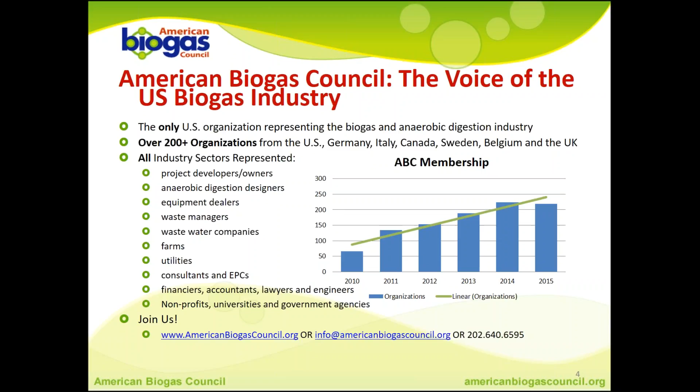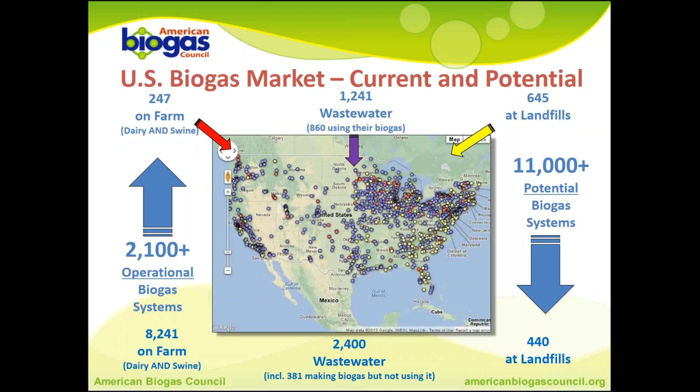We are just super excited that all of you are able to join us today, because this is the most widely attended webinar, at least for the folks who have registered for it. When I checked an hour ago, we had almost 400 people signed up for this, which makes it our largest, most popular webinar ever. So we're really excited to be reaching so many folks to talk about biogas, which is, of course, a big focus of the American Biogas Council. And we hope that you'll learn a lot.

Today's presentation is transforming wastewater to energy, focused on our anaerobic technologies for food and beverage facilities.

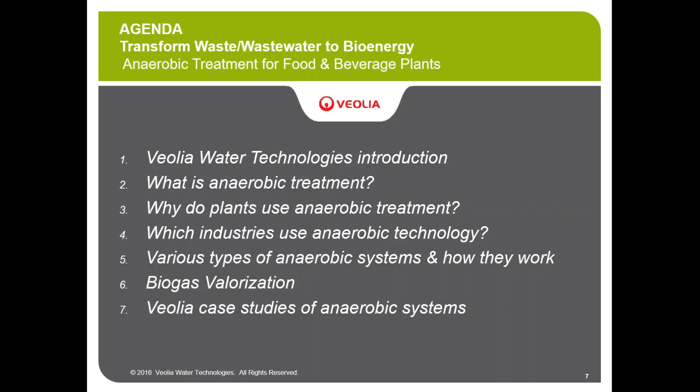Here's our agenda for today's discussion. I'm going to start with a brief introduction of Veolia Water Technologies, then go over the simple parts of what anaerobic treatment is, why plants use anaerobic treatment, and which industries. Then we're going to get into various types of anaerobic systems, how they work, talk about biogas valorization, and end with a number of anaerobic case studies.

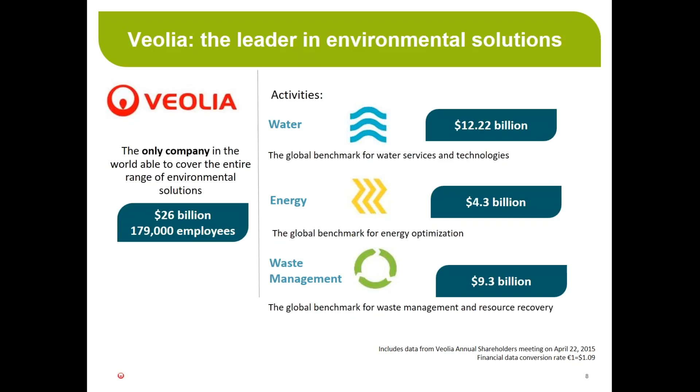Veolia, as Patrick alluded to, is a leading water treatment company. We are a $26 billion international company focused on water, energy, and waste management. As you can see based on the split of our revenues, $12 billion of water treatment revenue makes us the largest water treatment company in the world.

Veolia is comprised of a number of operating groups involved in water treatment. The Veolia Water Technology Group is where we reside, and we design and supply water and wastewater treatment systems for municipal and industrial users.

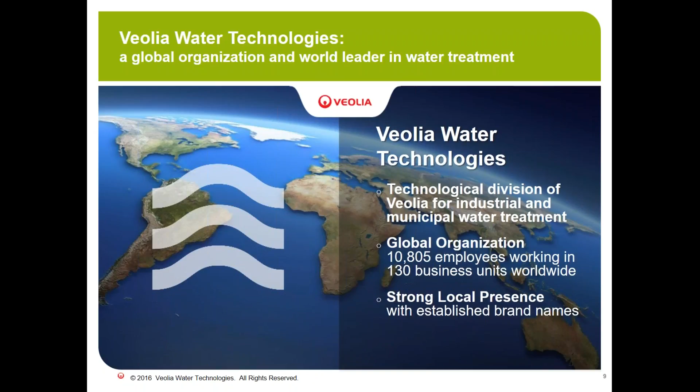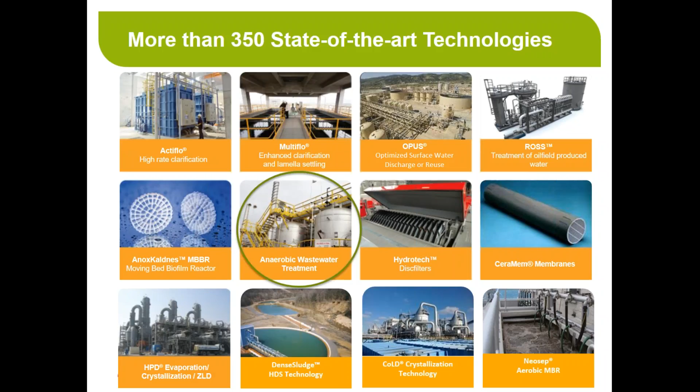The anaerobic technology within Veolia resides within the BioThane group. BioThane is now going on 10 years since they were acquired by Veolia. They installed their first anaerobic system 35 years ago, and there are now more than 600 full-scale installations of our anaerobic systems worldwide. So we have 35 years of experience in this technology, many repeat customers, and unmatched capabilities in this field.

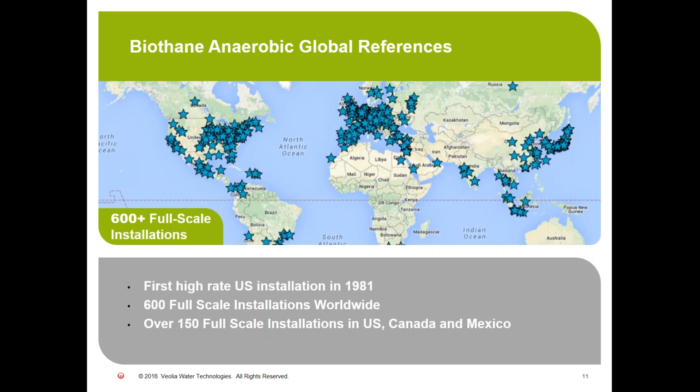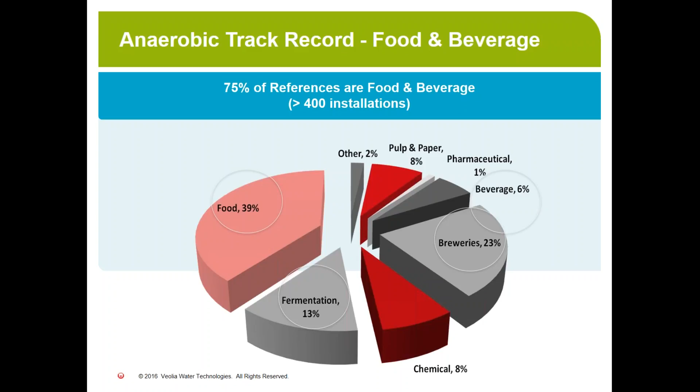You can see here a pie chart breaking down the installation references that we have in anaerobic. Anaerobic water treatment tends to favor application in high-strength waste streams, so we see a very large percentage of our installations based in food and beverage, including brewing, and in other fermentation broth applications where you have high-strength organics.

Now we're going to go into a little bit of basic technical discussion about what anaerobic treatment is.

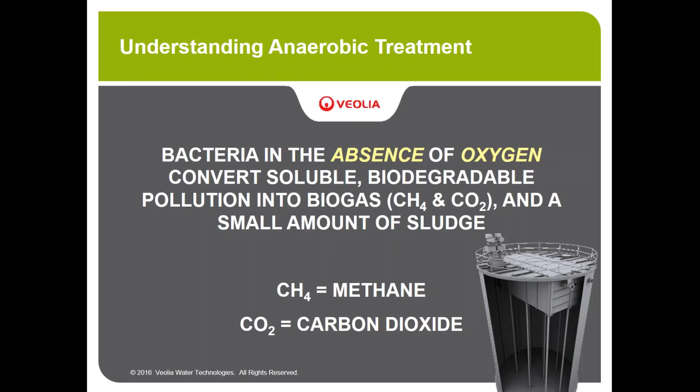So technically, here we go. The anaerobic digestion - what does anaerobic mean? It's basically bacteria in the absence of free oxygen, and we're converting organic biodegradable material into biogas, a combination of methane and carbon dioxide, and producing a small amount of sludge. So we'll talk today about conversion to methane, which is where you get the energy, and also conversion to carbon dioxide as part of the biogas.

This is a diagram of the metabolic pathway for anaerobic digestion. You have hydrolysis, which is the breakdown of organic material into simple materials, simple sugars or amino acids, and then two steps in the digestion. We have acetogenesis, which converts those simple materials into volatile organic acids. Then you have a second step, methanogenesis, where the methanogens convert those fatty acids into methane.

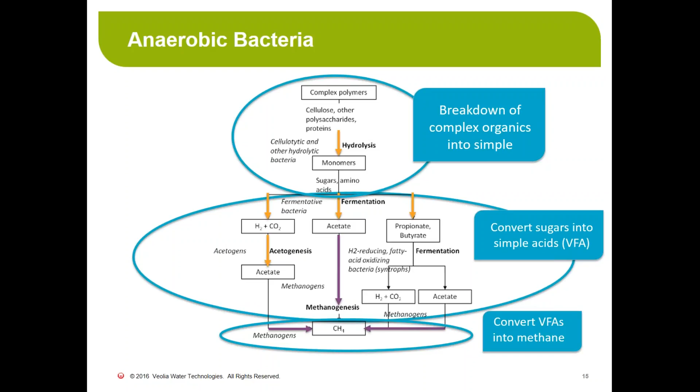Some simple terminology that you'll hear in all wastewater discussions and will be used later in the presentation. Most people probably know the first of these: COD refers to chemical oxygen demand, the amount of oxygen required by a wastewater to oxidize all the organic material. Biochemical oxygen demand, BOD, is always lower than COD, and represents the amount of oxygen for bacteria to biologically degrade the organic material present. Total suspended solids, self-explanatory - insoluble suspended matter which may or may not be degradable, but affects the design of anaerobic systems.

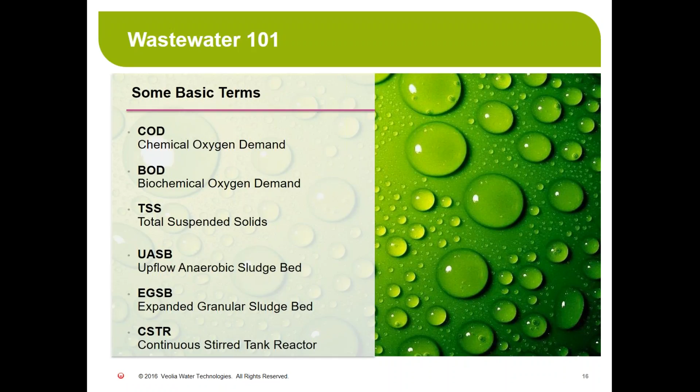Then we have three different acronyms we use to describe the type of anaerobic system. We have UASB, which describes an upflow anaerobic sludge bed, and EGSB, a higher rate upflow system - the expanded granular sludge bed. And then we have CSTR, which you can imagine is a continuously stirred tank reactor, a different type of reactor used in anaerobic treatment.

So, some of the reasons why we would want to use anaerobic treatment for wastewater.

Some of the key drivers as to why you would want to look at anaerobic digestion: number one would be reduction of your surcharges. Most sites are charged based on BOD or COD discharge, and anaerobic digestion can be used to reduce those. You may have that situation whether or not you are discharging to a POTW or direct discharging to a stream. It could also be part of a corporate sustainability program.

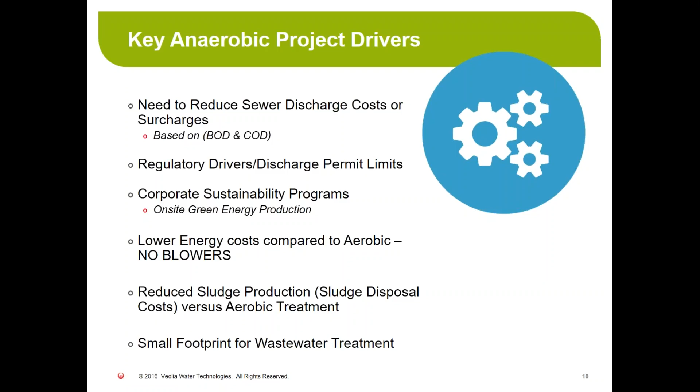In terms of what anaerobic in particular does compared to aerobic biological treatment, it has low energy use because it doesn't require blowers to produce a large volume of air. It also generates a much lower amount of sludge for disposal than an aerobic system, and it's typically a much smaller footprint for equipment, saving space in your plant compared to an aerobic basin.

This diagram gives an illustration of what I just said. If you start with 100 kilograms of COD, on the left you have an aerobic system, on the right an anaerobic system. You can see on the left a bit more conversion of the COD: you have 90 to 98% COD reduction with aerobic, and 85% with anaerobic. But notice the amount of sludge — you have 1/6 to 1/12 the amount of sludge produced in an anaerobic system, and you don't have the 100 kilowatt hours of electricity required for the blowers. So with an aerobic system you have a net energy consumer and high sludge production. With anaerobic, you produce biogas, so you're a net energy producer with low sludge production.

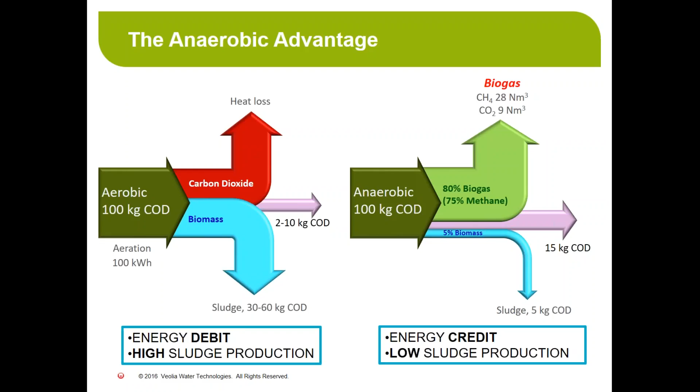We're going to talk more in detail about these types when I turn it over to the technical team, but in general we're talking about high rate anaerobic systems being the UASB and EGSB — high rate means it's able to be loaded at a high organic rate. The medium rate would be a medium loading rate, either the CSTR type or a new type combining CSTR with membranes, our membrane anaerobic MBR system. Then for low rate or high solids reactors, we have our traditional CSTR.

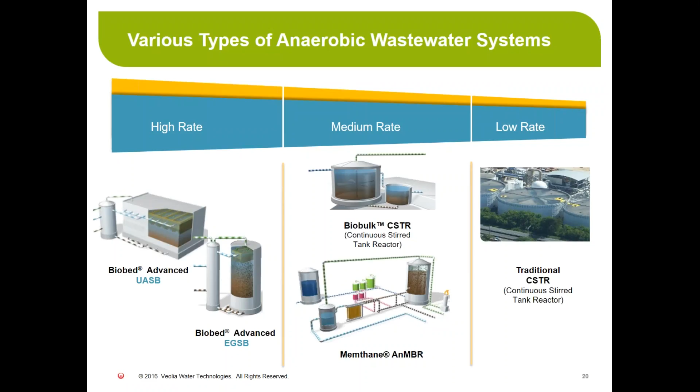The choice of which of these systems we use for a given application depends primarily on the degradability, the COD concentration in the water being treated, and the amount of suspended solids in the system. The first diagram shows all three systems, but describes the granular sludge system, which is what we get from the high rate units. They're designed for the lowest range of COD and for lower suspended solids material. Basically, the retention time and loading rate in a high rate reactor allows for excellent digestion of soluble COD and less so of suspended solids.

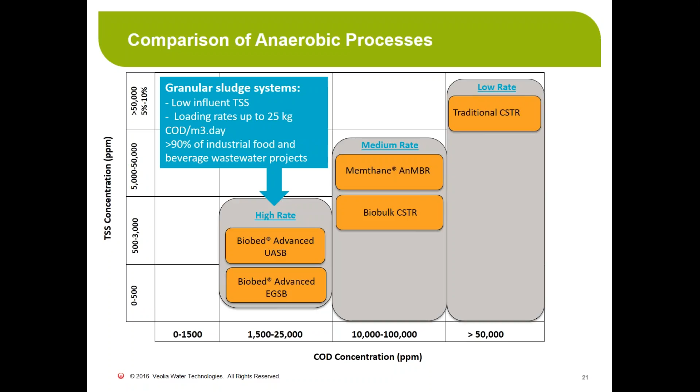The middle category, where we have our medium rate membrane and biobulk CSTR, is designed for much higher COD loadings. We're limited to 25,000 in the high rate, and we're showing between 10,000 and 100,000 here for COD in the medium rate. On the y-axis, you can see the amount of suspended solids allowable in these technologies is much higher than with a high rate system.

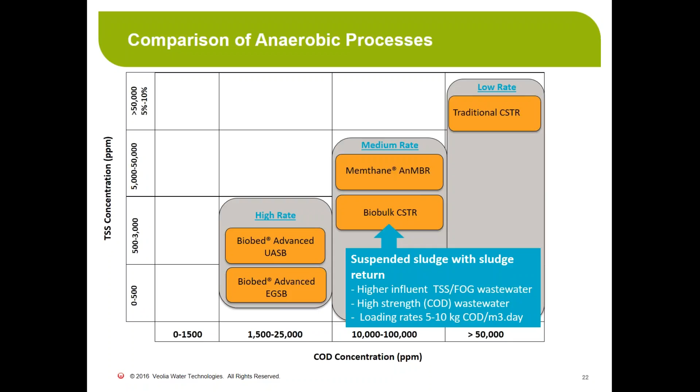The low rate system, the CSTR, is for both high concentration of COD and also very high suspended solids. This technology would potentially be used for slurries, like a starch slurry, or very high fats, oil, and grease, or suspended solids.

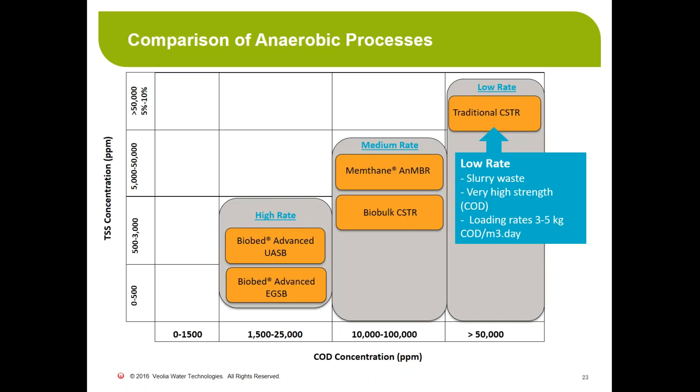In many applications, the effluent requirements will be lower than what you can achieve with an anaerobic system alone, given that your removal rate will be maybe 85 to 90% in most applications. It's very common that an anaerobic system would be combined with additional technologies to reach lower discharge limits for COD or suspended solids. Veolia supplies full process trains and provides full process guarantees on our systems, and many of these combine the anaerobic systems we're discussing today with physical separation equipment or aerobic polishing equipment to achieve lower discharge limits, or potentially membrane systems to allow for water recycle from the wastewater.

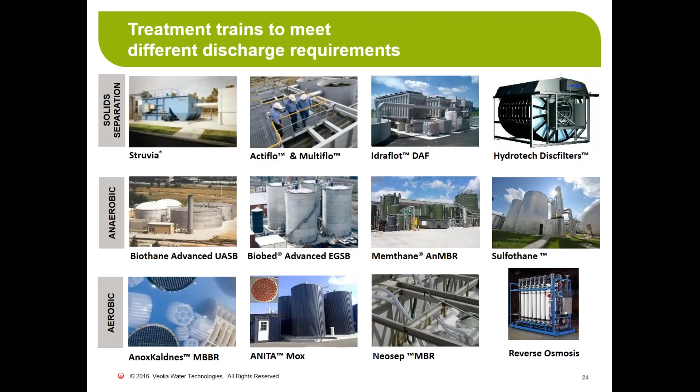Thanks, Dan. We'll transition to Greg and Jill here in a second, but Dan, while I've got you here, just two quick questions: for the systems you were just describing, are they all continuous, or are any of them batch systems?

Most of these systems are continuous. All of the granular-based systems are continuous systems. They can all be continuous, I guess would be the answer.

If you have a batch process in your production facility, typically we have some type of equalization tank to allow the system to be continuous. Although there are a lot of facilities in the food and beverage world that don't run on weekends or holidays, the good thing about an anaerobic treatment system is that it can basically shut off during the weekend without any feed and be perfectly fine to start back up again on Monday morning. So we take a batch process and typically make it continuous with equalization, but shutting down for weekends or nights is very common.

And all three of the systems are applicable to the food and beverage industry, right? Correct. We have systems installed of all three types in the food and beverage industry.

We want to go into a little more detail about the main processes that Dan talked to us about. So we're going to talk about the advanced biobed EGSB, which you can see in the small diagram in the lower left-hand corner, and the advanced BioThane UASB, shown in the lower right-hand corner. Our modular plants are in the middle—they're EGSBs, prefabricated and ready to go.

I also wanted to mention that we're developing and working to get better control of our processes through something we call smart control, which allows for less operator involvement time and allows computer control of the system, saving on operating costs. If we have the next slide, please.

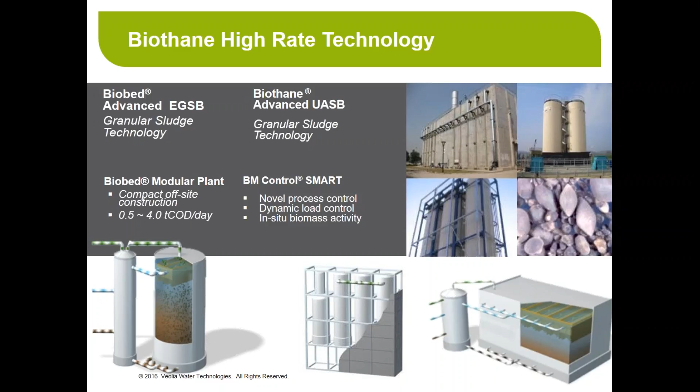The key to these high-rate systems is the granular biomass. These granules sort of look like caviar, as you can see in these pictures. The key characteristic of these granules is that they contain both the methane and acid-forming bacteria that Dan talked about. The big thing is they have a settling velocity of 60 meters per hour, which is phenomenal. If any of you are familiar with aerobic sludge, which takes forever to settle, these granules settle like rocks.

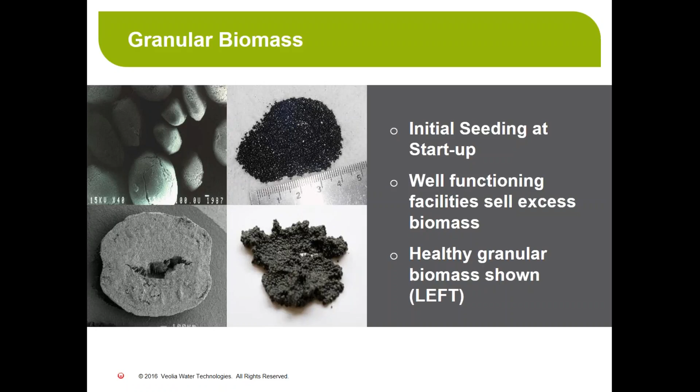These allow for a concentrated biomass bed at the bottom of these reactors. We can get up to 10 to 12% solids in the sludge bed. This allows for a very dense sludge bed in the tanks, which allows the tanks to be very, very small compared to what you would need to treat the wastewater aerobically. These bacteria also operate at relatively high F to M ratios—somewhere in the range from 0.4 up to as high as 1 pound per pound, that's pound of COD per pound of volatile suspended solids in the reactors. Next slide, please.

Let's talk about the BioThane UASB systems first. These were the first reactors in our system. They were developed many years ago in the 1970s in the Netherlands.

The wastewater then filters up through the sludge bed, where most of the soluble pollutants are converted into acids and then methane. It then filters up to a sludge blanket, which is really just a lighter density part of the biomass, and then goes up into the settler where the sludge, gas, and liquid are all separated.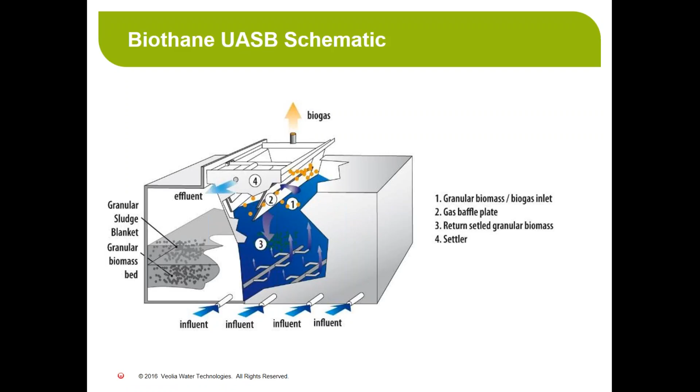Next picture, please. The EGSB actually uses the same sludge as we used in the UASB. It's all granular sludge, and we can use the sludge from one to feed the other.

The big difference between the UASB and the EGSB is that the upward velocities in the EGSB are higher than in the UASB. This is allowable because the settler is slightly different and allows for the higher upflow velocities, for the sludge to be separated from the gas and the liquid. But it's the same basic principle.

Most of the mixing in both of these reactors is done by the biogas. You'll notice that neither tank has any sort of mixing equipment in it. It's very simple: you put the water in the bottom, it filters up through the sludge bed, the sludge is separated at the top and remains in the tank, the gas is collected at the top of the reactor, and the clean water overflows at the top. Very, very simple, mechanically speaking.

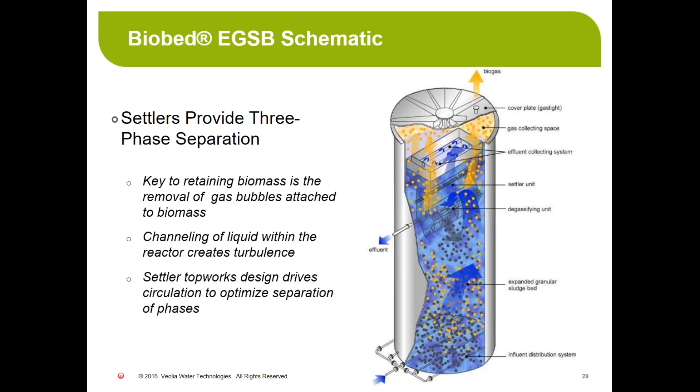Next picture, please. We've combined our original UASB and EGSB settlers and made a new advanced biobed settler, which combines the best features of the UASB and EGSB original settlers and added a tilted tube separator at the top. It's sort of like a fat lamella at the top, which allows more of the finer particles that don't settle at the higher upflow velocities to settle back into the reactor.

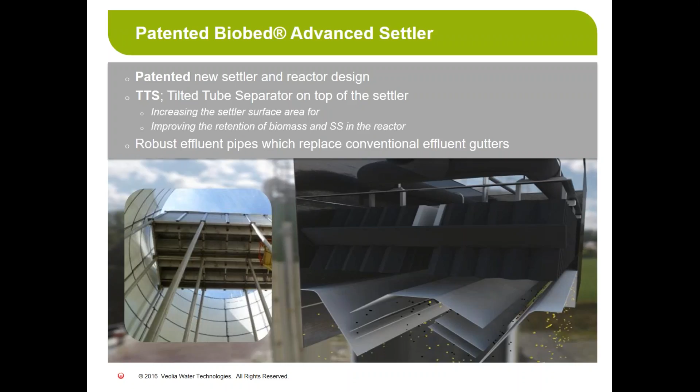The key to the settler is to keep the sludge in the reactor. If the biomass is not in the reactor, it can't do the work to create the biogas which everybody wants to collect and use. So this is a picture of our newest settler with the tilted tube separator on top. Now I'm going to turn it over to Greg to talk about our medium rate and membrane systems.

Thank you, Jill, for your discussion around the high rate systems. Now we're going to talk a little bit about medium rate systems. As was discussed, high rate systems really are for degrading soluble COD with low influent suspended solids. So what happens if you have higher influent suspended solids and you want to treat your system anaerobically? Then you move into potentially medium rate systems.

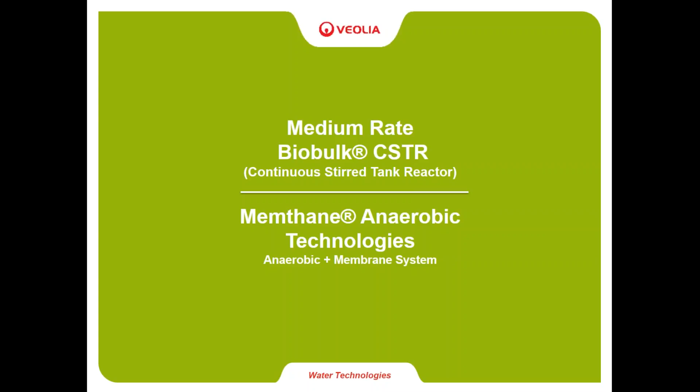There's two main types of medium rate systems. The first is CSTR technology, continuous stirred tank reactor technology. This is suitable for waste streams with higher COD, higher suspended solids, or specifically FOG, like you see in dairies and other industries. It can be a once-through system, or we can have a clarifier on the discharge to recycle some solids back, just like in an activated sludge plant. It's sort of an anaerobic activated sludge, you could call it. So this is a technology you'd use for CODs with high suspended solids or FOG in the influent that you do not want to remove.

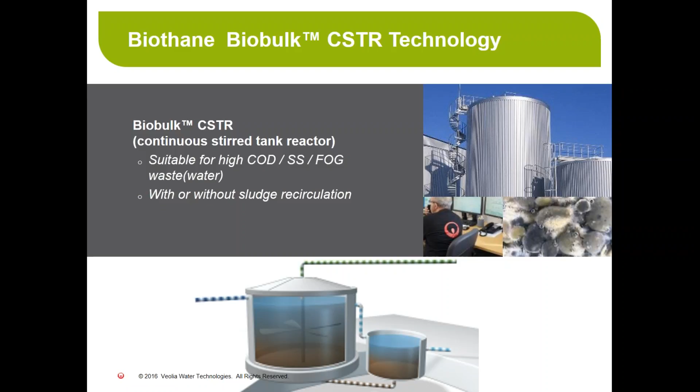The next generation of CSTR technology is coupling membranes to CSTRs. The main advantage of coupling a membrane to any biological system is that membranes are a physical barrier to sludge washout, and because of that, you can decouple the HRT, or hydraulic retention time, from the SRT, the sludge retention time.

So that allows wastewaters with high suspended solids that might traditionally need a CSTR of 15 or 20 days retention, to instead have a reactor vessel with only 1 or 2 days of hydraulic retention time, yet still have 30, 40, or 50 days of sludge retention time.

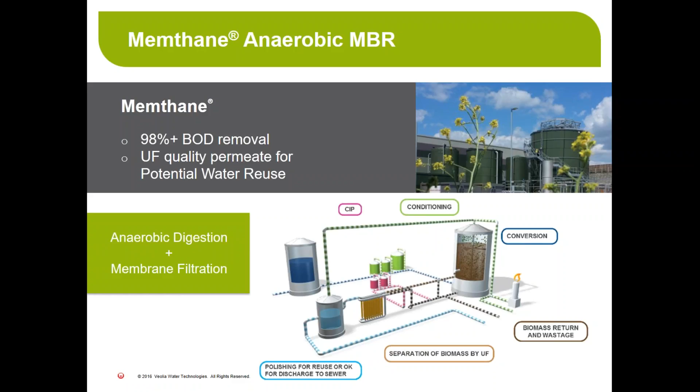The other large advantage of membrane technology is extremely high BOD and COD removal, where a traditional high-rate or CSTR system might get 85 to 90%. An anaerobic MBR system has recorded BOD removal rates of 99.5% in some applications.

So what are the major benefits of looking at an anaerobic MBR treatment process? First, you do not have to remove suspended solids or FOG in a pre-treatment device. A lot of people putting this system in are dairies or other food and beverage facilities that have high influent TSS, so would have to remove it with a DAF or a clarifier. You do not need that piece of equipment, and those solids, instead of being taken away, are digested in the anaerobic reactor.

Two is the biomass cannot be washed out. The biggest thing with any biological treatment plant, anaerobic or aerobic, is keeping the biomass in the tank so it can do the work. When you have a membrane system, the only way for the biomass to get out of the tank is for the operator to pump it out. So you really can't have any errors, bulking, or floating layers, etc., because the membrane is a physical barrier to keeping it in.

The third major reason is it can meet most sewer surcharge limits in one step. Most sewer surcharge limits, as people know in the food and beverage world, are 300 BOD, 300 TSS. That is difficult to hit in most anaerobic treatment plants, but in an anaerobic MBR, it can be hit without any post-treatment. In some case studies later, you'll see we can come in with CODs of 10, 15, 20, 25,000, and leave with BODs of 100 ppm with TSS that is negligible.

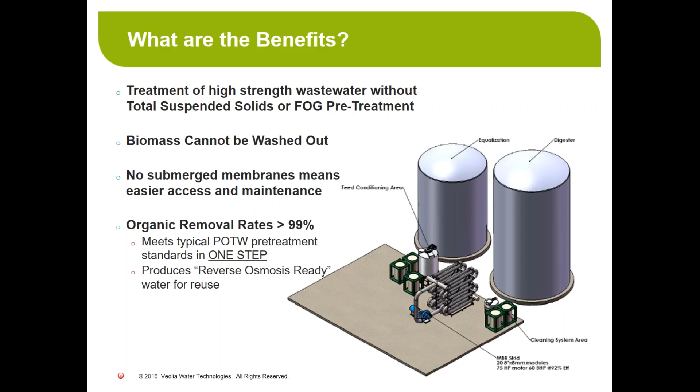Everybody wants to do anaerobic because of biogas. We're giving this presentation for the American Biogas Council, and we need to understand a little about what you do with the biogas you generate in these anaerobic systems. So we're going to look at the different ways people are valorizing their biogas, and then look at some of the different technologies to do so.

Biogas handling. Biogas gets produced in the reactors at very low pressure, usually a couple inches of water column, a quarter of a psi, and somehow needs to get into a burning device to essentially take that methane and convert it into heat or electricity. But before that can be done, there's typically three steps that need to occur.

One is to scrub out any H2S. Any sulfate that goes into an anaerobic facility, a large portion gets converted to H2S, which has issues we'll talk about in a little bit, and has to be removed from the system, so typically you need to scrub it out. Second, you typically need to compress it. Generators usually require 1 or 2 pounds. Boilers might need 10 or 15 or 20 pounds, etc. So you have to compress your biogas.

The third thing you typically need to do is dry it. Biogas comes out of an anaerobic reactor 100% saturated in moisture, and burning devices typically do not like moisture. So you have to remove that moisture, typically with refrigerated cooling. So when you have your biogas from your reactor, typically it's scrub, compress, dry, send to a burning device.

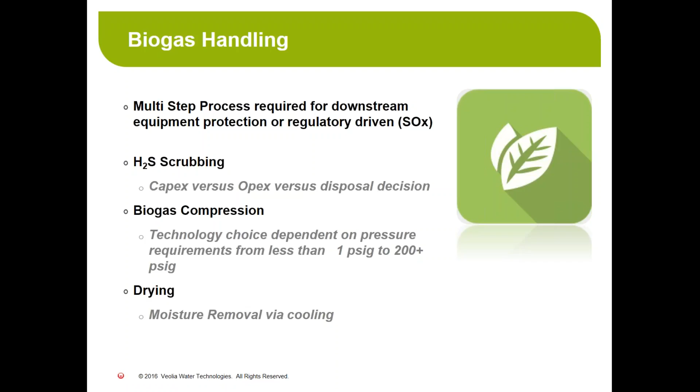So what are people doing with their biogas in the food and beverage world? There are three typical things they do. The first, which we don't have on this slide but has been done for 25 years, is just send it to the facility boiler. Most food and beverage facilities need steam and have an in-production facility boiler. The simplest thing to do, and what was done for a long time, is just to compress it and send it off to the boiler to displace natural gas coming off of the grid.

About 5 years ago, things started to change into CHP generation. Why? Two big reasons: one, generator costs keep coming down while efficiency keeps going up. And two, the cost of natural gas is extremely low while the cost of electricity continues to go up. That is pushing the economics of biogas into CHP and power generation and heat recovery.

The other major reason is incentives. There's a lot of incentives out there for green electrons. Some of you might be familiar with the ITC, the same tax credit program that the solar and wind people get. You can get those same tax credits for green power.

So most people in the food and beverage world are now looking at CHP generation as their mode of valorizing biogas produced from an anaerobic treatment facility.

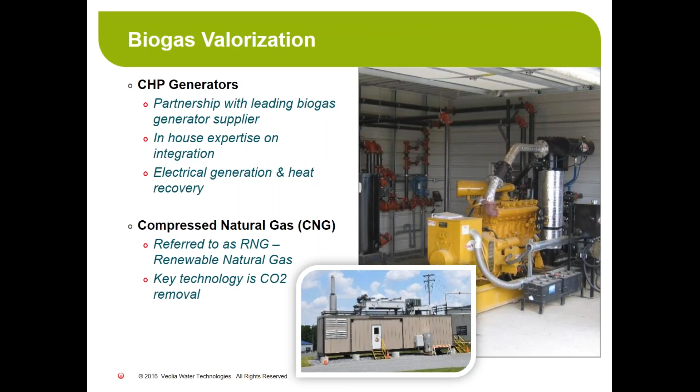As I talked about before, one of the keys to biogas valorization is H2S removal. Compression and drying has been done forever. H2S removal is a little bit more tricky. There are a lot of different technologies out there to do it, and if it's not done properly, you can have some issues and concerns, and really spoil some large dollar equipment downstream.

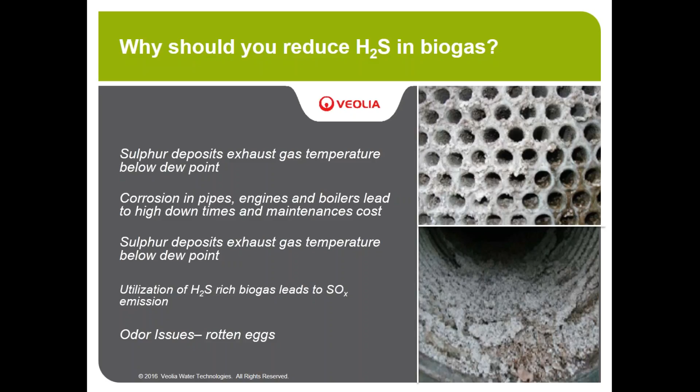So why do you remove H2S from biogas? Very simple: H2S plus H2O makes H2SO4, which is sulfuric acid. So if you have an excessive amount of H2S and moisture together, it will make H2SO4 and corrode out your burning devices, which are boilers and generators, costing hundreds of thousands, if not millions of dollars, and you don't want to do that. Another main reason is emissions, SOx. When you burn H2S it turns into SOx, and you might have to eliminate SOx for Title V or other air permit reasons. And the third reason people scrub is H2S smells like rotten eggs, so it's an odor issue sometimes as well. So pretty much all the time now, people have to remove H2S from their biogas.

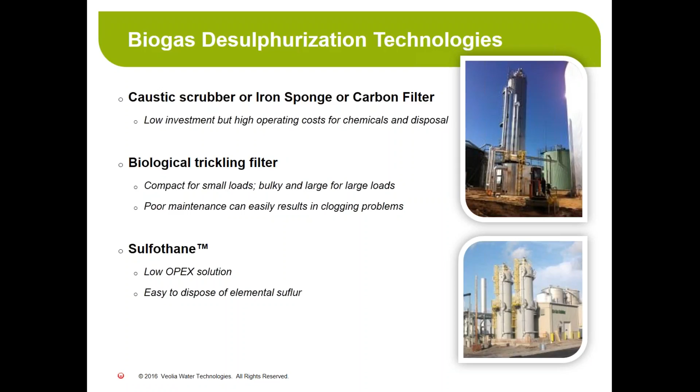It's a relatively simple, straightforward system. You have a scrubbing tower where the biogas flows up through a packed bed. That packed bed has a circulating liquid around it, and that circulating liquid is a biological solution.

It's a little small aerobic system on the side, which main purpose is to regenerate caustic. And then it will have a settler, because you make elemental sulfur. That elemental sulfur will gravity settle and decant essentially to allow for much lower disposal volume, or in some cases you can actually run that through a press, or if you have an existing centrifuge or belt press, it can just be put in with your regular waste sludges.

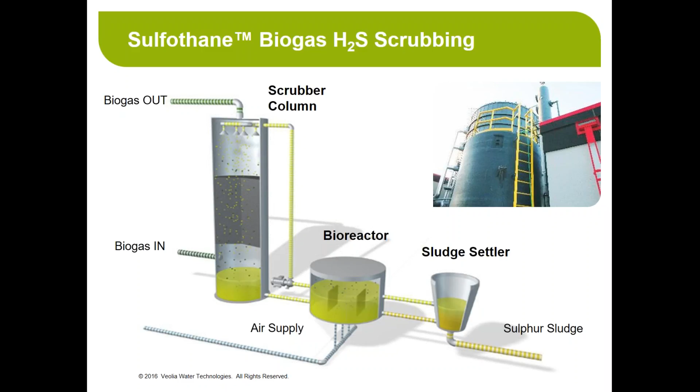So some of the key features of sulfothane: one, it can attain very high removal efficiencies, 99+% removal, H2S levels below 50 ppm, and there are systems out there that actually get below 10 ppm. You recover elemental sulfur. A lot of technologies, you always have to find out where the sulfur goes - it doesn't magically disappear. But H2S in gas always ends up in some form. The positive part about sulfothane is it ends up as elemental sulfur that can be pressed into a cake, or removed with easy disposal because it's not ultra low or ultra high pH.

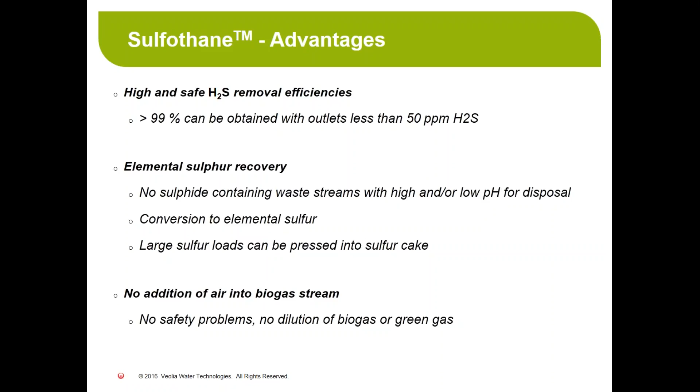The other good thing is it doesn't - there's some technologies out there that inject a small amount of air. Air and biogas can potentially cause some safety issues if controls aren't maintained. And if you're looking at potentially converting to green gas, air introduction has some large issues because pipeline quality gas can't contain really any oxygen in it.

So that sort of concludes a little bit of just some look at the different technologies in anaerobic and biogas treatment that are used in the food and beverage world. We're going to spend the last 15 or 20 minutes here discussing some different case studies where these are being applied in the food and beverage world. You get to see some graphs of actually how the system performs, and then we'll open up for questions at the end. So I'm going to turn it over here to Jill now to go over a couple of case studies, and then I'll finish up with a couple other case studies, and we'll have some case studies on each of the technologies that we went over today.

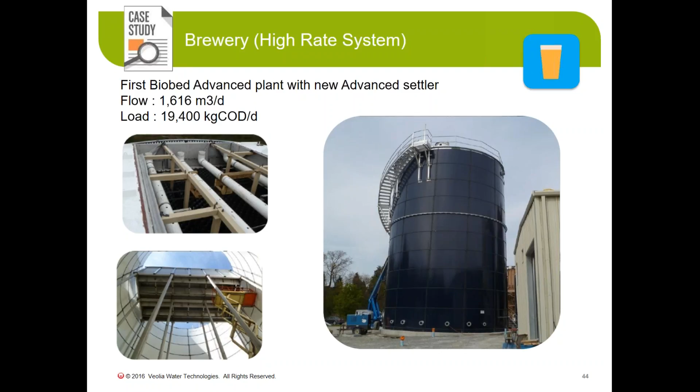So how is this wastewater treatment plant reactor performing? As you can see, they're getting over 90% COD reduction most days. The design influent COD concentration was approximately 12,000. They actually really run about 8,000 to 15,000, and the soluble COD is about 5,000 to 13,000. The removal rate for the soluble COD is 95%. As you can see, there's great variability in the green line, which is the influent COD, but very little variation in the effluent COD concentration. This is typical for all of our high-rate systems, where the influent can vary day to day, hour to hour, week to week, but the effluent quality remains very constant.

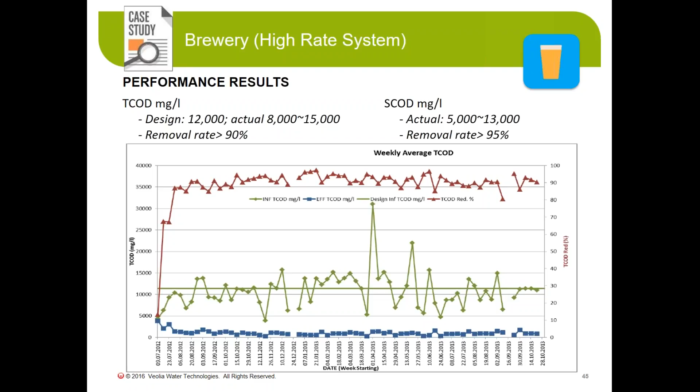The next plant I'd like to talk about is a juice manufacturer - beverage, again, another beverage application. This is a fruit juice application. In this case, the client had an existing aerobic facility, but their production increased, so the aerobic wouldn't be able to handle the increase in load. They therefore increased the capacity of their wastewater treatment plant by adding an anaerobic process up front of the aerobic facility. This project started in 2012, and the plant was started up in 2013, and it was a design-build contract for us.

The flow to this juice facility was 1 million gallons a day, and its load capacity was almost 25,000 kilograms per day. The influent COD concentration design was about 6,200, with a TSS concentration of 600, and you can see the nitrogen, phosphorus, and calcium numbers.

At the outlet, they get less than 3,700 kilograms of COD per day, or less than 930 milligrams per liter of COD. The performance is getting 85% total COD reduction, and the biogas production is 375 normal cubic meters an hour at 80% methane, which works out to 3.3 megawatts of gross calorific value.

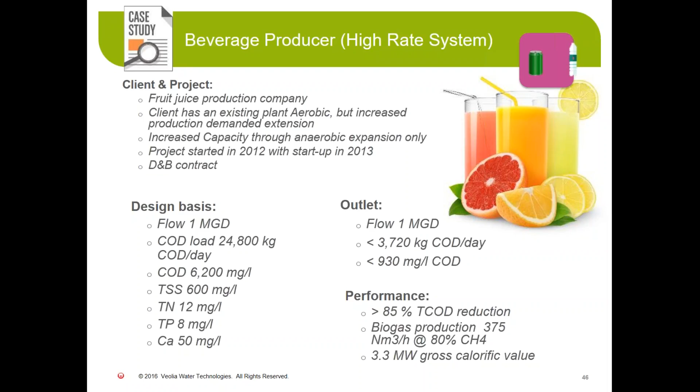Next slide, please. So let's look at the process here at the juice plant in total.

We start out by screening out any gigantic solids, and then we monitor the total organic carbon content of the water. If they have a dump or something where the total organic carbon is really high, we send that flow over to a calamity tank. Otherwise, the water goes on to a DAF to remove any smaller solids or FOGs in the system, and the calamity tank feed is bled back into that DAF to control the loading to the system.

We then go to a buffer tank, and from the buffer tank we control the flow going into the little skinny tank, which is a conditioning tank, we call it. From the conditioning tank we go to the reactor, which is a BioBed advanced EGSB reactor.

The biogas generated in this system either goes to a safety flare or to a sulfothane plant for scrubbing, and then after the gas has been scrubbed, it goes to the boiler, and the heat goes back into the facility's boiler.

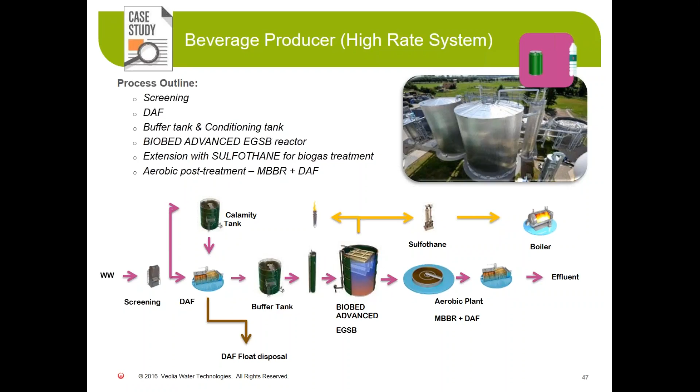The water from the advanced EGSB reactor goes into an MBBR aerobic facility, and then to a DAF to separate the solids out, and then the effluent goes to the sewer. Next slide, please.

The performance here, you can see, you get over 90% COD reduction, and again, you can see the variability in the influent COD, which varies from like 2,500 up to 5,500 milligrams per liter, but the effluent soluble COD is very, very close to 400 or below most of the time.

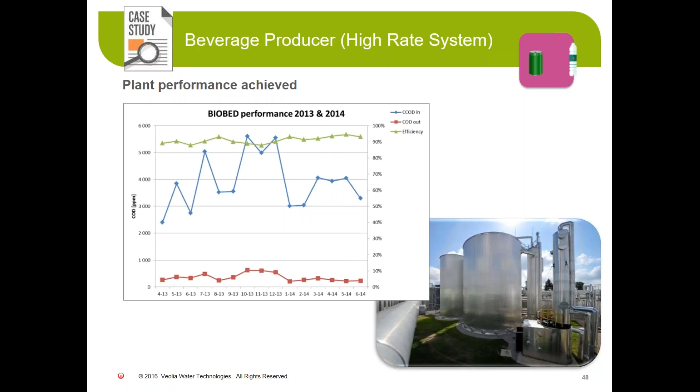Next slide. The third case study I'd like to talk about is, again, a brewery. What makes this special is this is a repeat customer, but the location of this facility is exceptional.

The client already had one of our facilities across the valley from where this plant is, but for their second brewery, the city wastewater treatment plant could no longer handle the output from the second brewery, so therefore they had to put in a pre-treatment system to handle the BOD.

This plant is located in a downtown hilly location, so it was very tricky to design a plant that would fit here. The big thing also here is this client is using the biogas in a CHP generator, and that heat is going back in to heat the wastewater and to generate electricity.

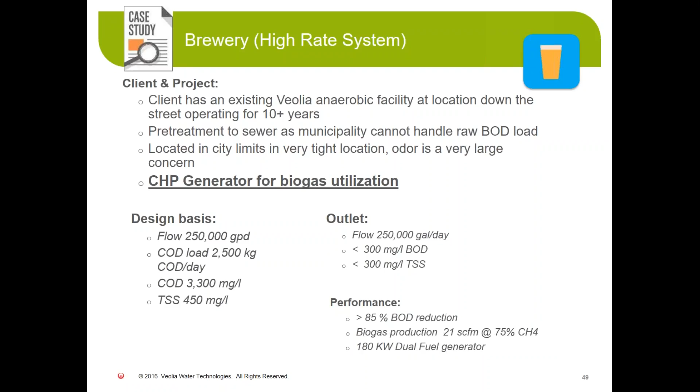The facility is designed to treat 250,000 gallons of water a day, or about 2,500 kilograms of COD per day. They get less than 300 milligrams per liter of BOD and TSS on the outlet. The BOD reduction is well over 80%, close to 90%, and the biogas production is about 21 CFM at 75% methane, which gives you 180 kilowatts of dual fuel to go to the dual fuel generator.

Next picture, please. Here's some drawings and figures of how close this... back one, thank you. In the upper left-hand corner is a 3D design before we built the system.

The building you see behind it was an old building that had been abandoned for about 30 years across the street from the brewery. They decided to take that building and make it a multi-purpose building. The front half, which you can't see, is now the gift shop and museum for the brewery, and the back half is the wastewater treatment plant.

So they're pretty confident that there's no odors here, and the system is not abrasive or offensive to anybody in the neighborhood. The two blue tanks you see there are the reactors. The two smaller tanks to the left are the equalization tanks, and these are our package plants.

You can see the picture here, how steep the hills are here, and putting in these package plant reactors was certainly a challenge. The EQ tanks and the reactors are both 12 feet in diameter, and the reactors are 48 feet high, and the EQ tanks are 34 feet high.

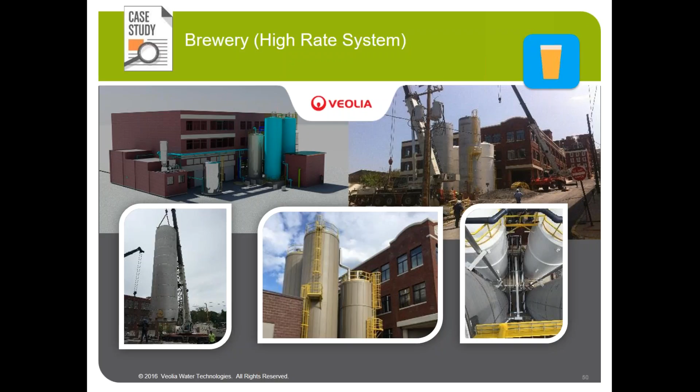And now I'm going to turn it back over to Greg to discuss some sulfothane and CSTR systems that we have. Greg? Okay, thank you. Next slide, please.

So we're going to look at a sulfothane case study and then a couple of anaerobic MBR case studies here.

So this is a snack food manufacturer. They have an anaerobic MBR facility that was built for power generation. The reason they did that was incentive-driven power generation, plus looking at the long-term power cost versus natural gas cost.

They also did a pretty detailed analysis on different sulfur technologies. We looked at several different technology approaches for them, and the sulfothane technology won out via a 10-year net present value evaluation, mainly due to its very low caustic usage and the ability to produce elemental sulfur, which is easily disposed of. You can see the anaerobic reactor sitting right next to the sulfothane system, which sits outside.

This facility is located in South Dakota, so it's very cold, but that's not an issue. The anaerobic reactor is 48 feet tall, for some understanding of scale. The sulfothane scrubber is the large skinny tower, about 30 feet tall. Next to it is the aerobic tank, about an 8-foot diameter vessel, about 12 feet tall.

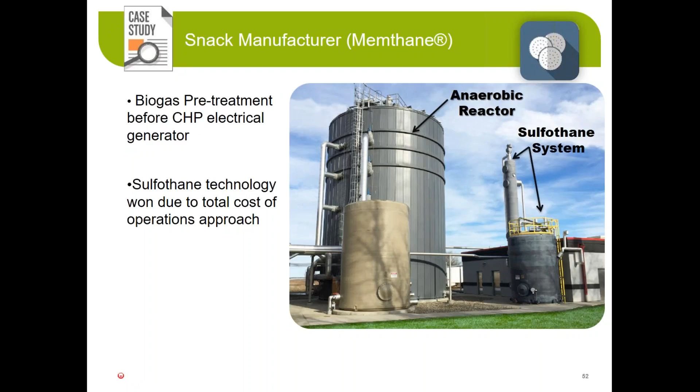So you have the scrubber column there, a large packed tower about 2 feet in diameter and about 30 feet tall. The reactor sits next to it, and then you have an equipment skid on the right, located in the building right behind those two. It's a pretty compact system for H2S scrubbing, with 3 main pieces: the scrubber, the reactor, and a pump skid.

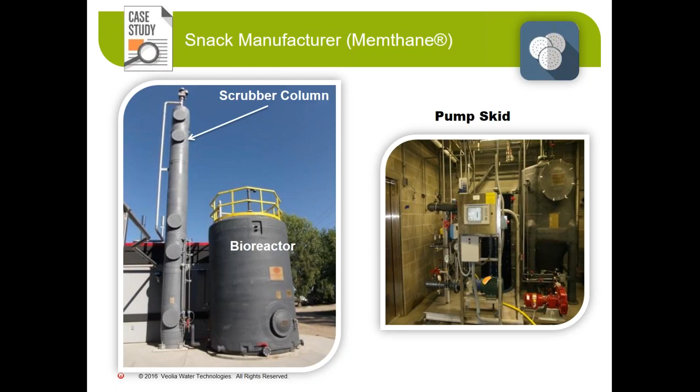The design for this system was about 100 CFM. They run about 40 to 70. The gas is pretty variable. H2S coming in is pretty high, 6,000 to 8,000 ppm, and the outlet for sweet gas is less than 50 ppm.

If anybody wants to go see it, they allow site visitation. I don't suggest going there in the wintertime. I was there a few Decembers ago, and it was negative 22 degrees Fahrenheit with about 30-mile-an-hour winds. So I suggest you go in the spring or fall.

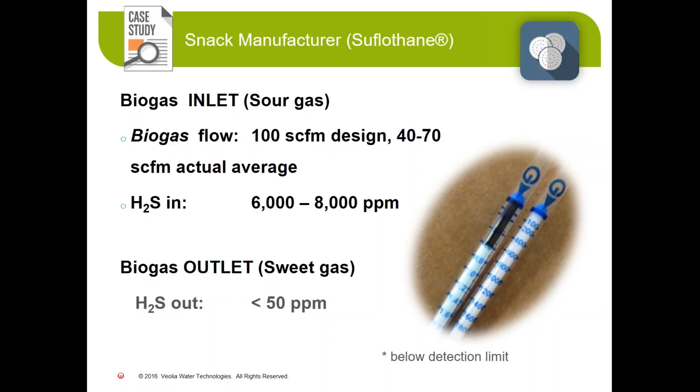Now we'll look at a couple of case studies on the anaerobic MBR technology. We'll go over 2 main ones, one at a food producer and one at a dairy plant.

So this is a food producer that produces a wide variety of products, probably 15 or 20 different lines, anything from sauces, jellies, salsa, syrups, all different types of condiments. So the wastewater is constantly changing. It has a very high COD of about 20,000, TSS of 2,000. But the big thing is they had to meet a 300 BOD TSS sewer limit.

That was a hard limit for them. They were not allowed to just pay a sewer fee above that; they had to meet it. If you get 90% reduction in a traditional anaerobic system, 20,000 times 10% is 2,000, so obviously you're not going to meet that 300. But an anaerobic MBR system can meet it.

So instead of having an anaerobic system followed by an aerobic system, we had an anaerobic MBR system that met it all in one. And another thing here is when you're building your wastewater treatment plant, you don't call it a wastewater treatment plant — you come up with a fancy name, such as the process optimization and water recovery system. So that's what this wastewater treatment plant is named.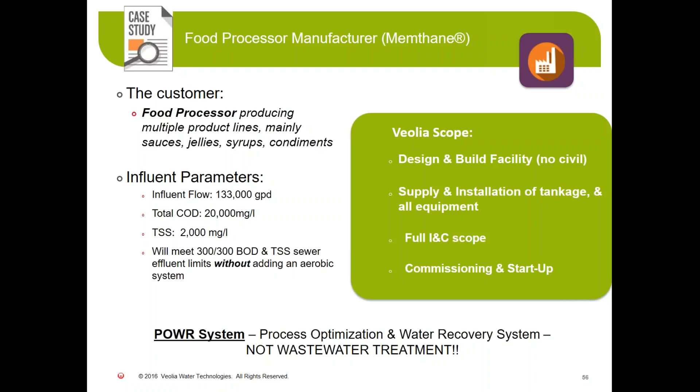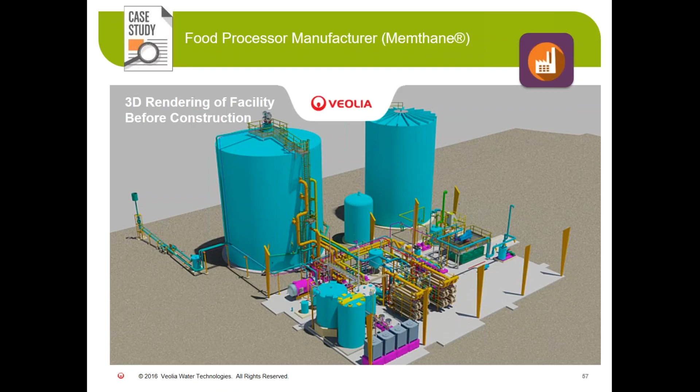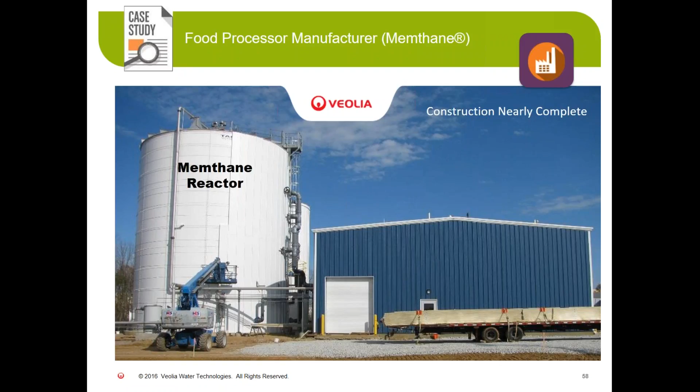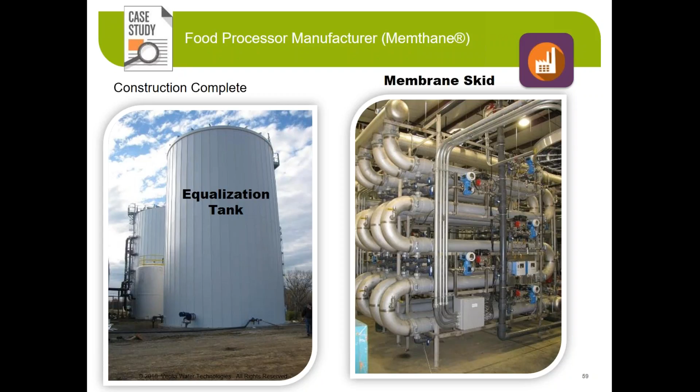The discharge from this system has been measured with BODs of less than 50 ppm. So you come in with a COD of 20,000, you leave with a permeate BOD of less than 50. It is running extremely well and consistent.

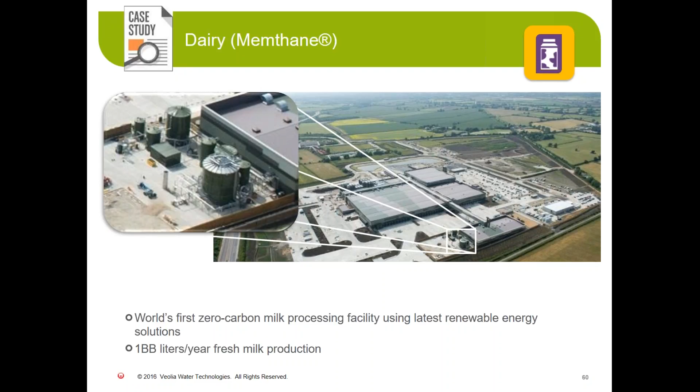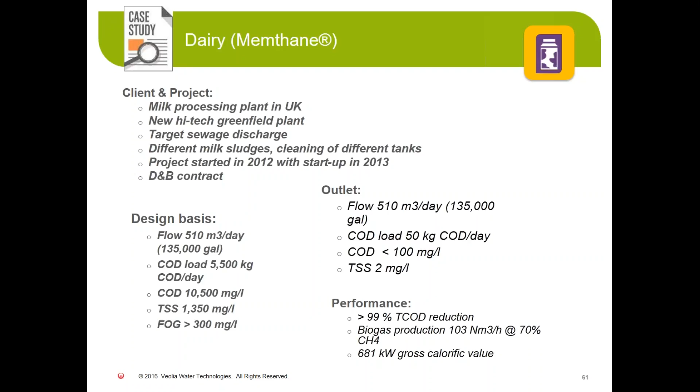As I said, this is a milk processing facility located in the UK. It had a very similar situation where it had to meet some pretty stringent discharge requirements in the sewer. It's designed for about 135,000 gallons a day. The big thing here with dairy wastewater is it has high FOG coming in, which in most systems requires removal via DAF. This system just digests that FOG, and gets COD, as you'll see in some graphs later, that is extremely low, less than 100 ppm, greater than 99% COD reduction, and they send all this gas back to the facility boiler.

This system's been up and operational now for about 3 years and actually went through a very large expansion, doubling the size of the plant about 18 months ago. So the facility ran so well for the first 18 months that when they went through their dairy production expansion, they also expanded the anaerobic plant by adding a second reactor and another set of membrane skids. So almost a repeat customer, you could say, in a very short period of time.

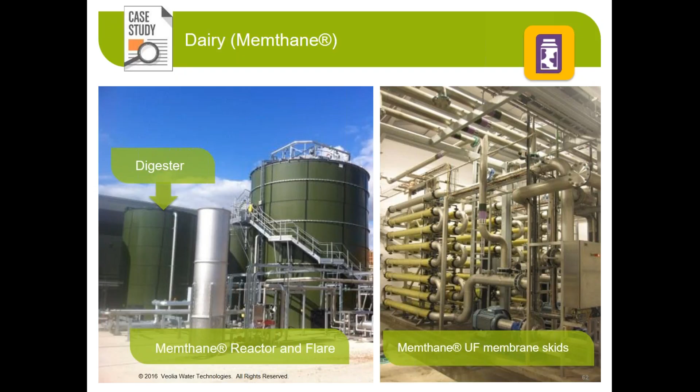The treatment train here: some very rough screening to screen out any fibers. Fibers are an issue with membrane systems, so you want to make sure you get rid of them before you hit the membrane. Then it goes into the anaerobic reactor with the membrane skid. The waste solids from the system are centrifuged for a cake. The biogas gets sent to the facility boiler, and there's actually a small nitrification tank. They had ammonia limits on the discharge of the system, and in the anaerobic system, most nitrogen gets converted to ammonia. So there's a very small, short retention time tank just to nitrify the ammonia before it went down into the sewer facility.